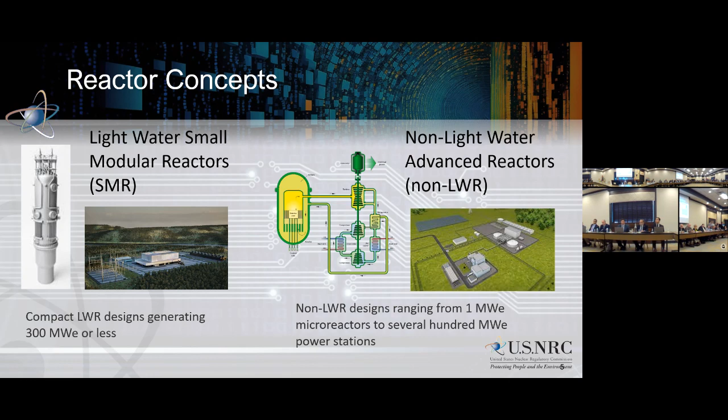So, starting with the licensing pathways for licensing an advanced reactor or any new reactor within the United States. The Atomic Energy Act granted authority to the NRC to license and regulate commercial or civilian reactors in the United States. For all commercial civilian plants, you have to get NRC approval before you can build and operate a nuclear power plant. The NRC maintains oversight of those plants throughout the life of the plant, from construction through operation, decommissioning, et cetera.

If you want to license a plant today, you have two main pathways within the NRC's regulations, in Title 10 of the Code of Federal Regulations. Part 50 was the original licensing pathway; most of the existing fleet has been licensed through the regulations in Part 50.

That is considered a two-step process, because you start by applying for a construction permit to authorize building the plant, and then separately follow that with an application for an operating license, which would allow you to operate the plant.

Later we developed Part 52, which was an evolution considered a single-step process, because it combines the construction permit and the operating license into one application—what we refer to as a COL, or combined license. That process was used recently for the Vogtle designs.

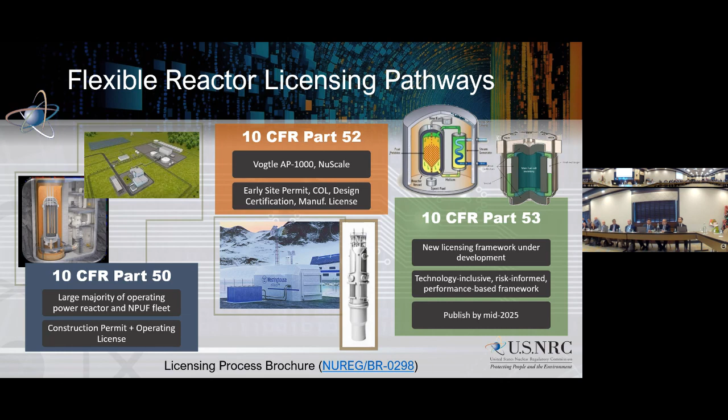So, thank you. I thought I'd give you a little more detail on each of these processes. For the Part 50 process I mentioned, the applicant—the utility—would submit a construction permit application, and we review that application, assessing the safety of the plant based on the preliminary plant design.

The public hearing is one of the ways public involvement can be factored into this process. The Atomic Energy Act and our regulations require mandatory public hearings for some of the licensing processes, and there are other opportunities for additional hearings at certain points.

So step two, the operating license application - at some point while construction is ongoing, after we've issued the construction permit and they start building the plant, the applicant can submit their operating license application while the plant is being built. That operating license application is based on final design information.

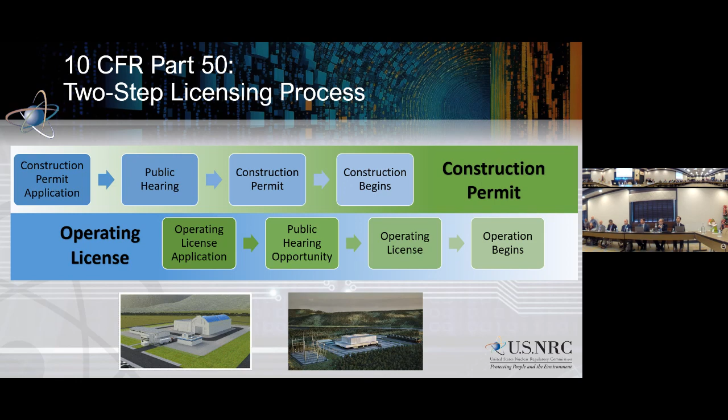So many of the current fleet, most of the current fleet, was licensed under Part 50, and many of the new advanced reactor designs are using the Part 50 process - a construction permit - because of the factor that they can start earlier with building the plants.

Those two reviews are the key areas, the key components of the overall review, and will eventually inform the commission on the decision whether to grant the license. When we issue a combined license, we're authorizing them to build and operate the plant.

Now there are criteria they have to meet once the plant is built - we call them inspections, tests, analyses, and acceptance criteria - that they have to meet before they can actually load the fuel and operate the plant. So there are still some checks after the plant is built before they're allowed to actually start the plant.

Some of the other things you can do under Part 52: you can apply for an early site permit, which basically lets you pre-approve a site without having your reactor design picked yet. That looks at site criteria to make sure it's a safe site for the plant, emergency preparedness considerations, things like that.

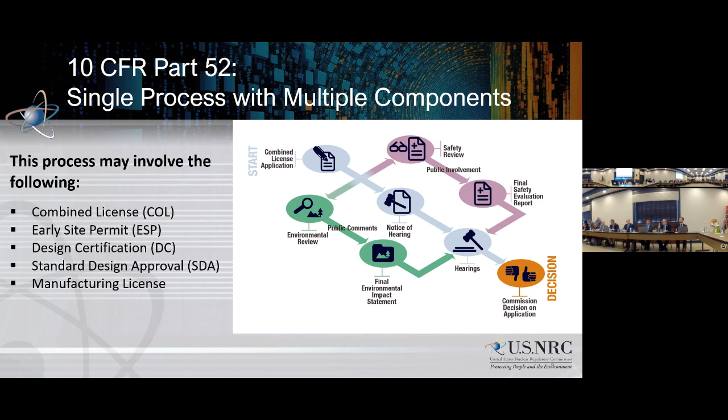Part 53 is, as I mentioned, the heart of our efforts to develop a flexible, technology inclusive, risk informed licensing approach. It's the keystone of building that regulatory framework, but there are many other activities that go along with preparing for that framework. Technology inclusive means that when the Part 53 pathway is available, you can use it for any type of technology. Our current regulations were built mostly geared toward existing light water designs, so this is meant to be more neutral.

I will note that even when Part 53 is available, a plant still could use Part 50 or Part 52 regulations. Those are options of licensing pathways. Risk informed means we're scaling the requirements of our review based on the risk and consequences of the facility, and performance based refers to the regulation creating clear and objective criteria to assess performance, while licensees have the flexibility to determine how to meet those criteria.

So here's where I started to mention the parallel reviews. I'll spend a couple slides talking about how these go in parallel. If an application is accepted, we proceed with an environmental review and a safety review, and those are focused on developing two key documents.

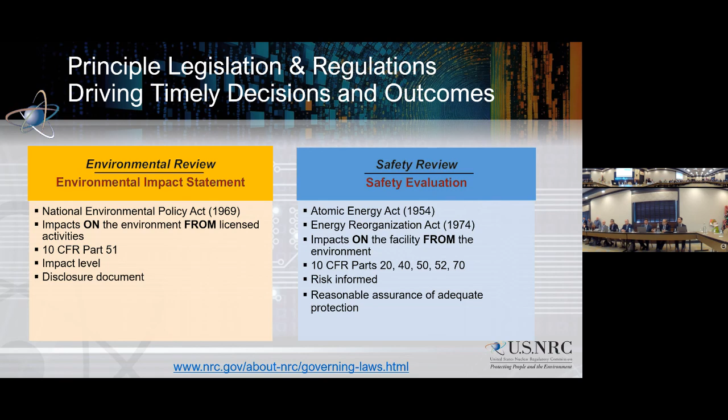Our current regulations are based primarily on the original designs of light water technology, and we're developing this technology inclusive framework. There are significant differences in how these plants are operated, controlled, and moderated, but fundamentally it comes down to key fundamental safety functions that we review as part of a safety review. Every application has to define what are called principal design criteria, which form the basis of the safety case for an application for a plant.

We have in our regulations design criteria that tell you how to establish those design criteria for your design. There are a number of areas spelled out in Part 50 and our general design criteria—I think there are like 64 criteria—but it ultimately boils down to key fundamental functions: reactivity and controlling the power of the reactor, how you control that reactivity, the fuel being a key component—how you maintain the condition of the fuel and qualify it for use—and the systems used to control that reactivity or power of the plant.

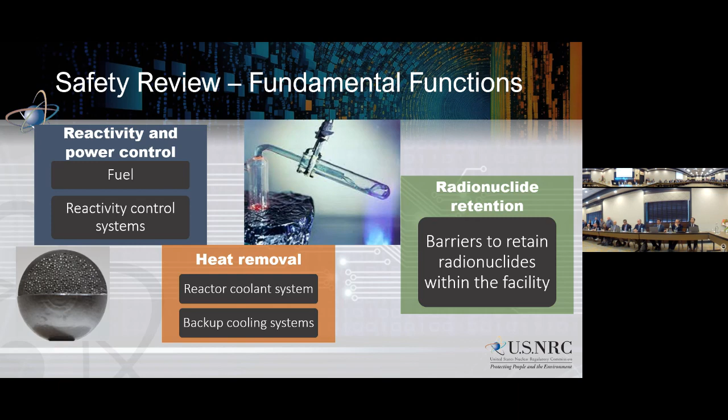This provides a little more detail on some of the key topic areas I was alluding to within those fundamental safety functions. The safety review looks at a number of things.

I mentioned fuel qualification and reactivity control, things like instrumentation and control, and radiation protection programs for both workers and the public. Accident analyses look at potential accidents and, based on the design of the plant, understanding what those potential accidents are and ensuring you've appropriately analyzed them and have systems in place to prevent and mitigate any potential accidents. Then operational programs—there's a whole host of operational programs that are part of the application as well, which we review to make sure the plant will be operated to meet the safety requirements of regulations and the adequate protection of public health and safety, as noted in our mission.

The scoping process is where we go out and meet with the public in the local area, in the affected area where the plant is proposed to be built. We gather public comments both at meetings, or they can submit written comments during that scoping period. That's followed by a scoping summary report to let people know what comments we received.

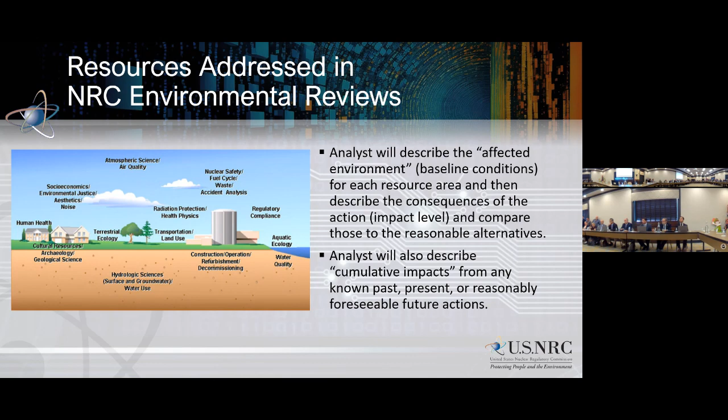Coming down to the last few slides here. I wanted to give you a little update on what we're seeing. We've been preparing for advanced reactors and small modular reactors for a number of years, and we have a few reviews underway right now, as a matter of fact.

Kairos Power is a company with a test reactor, the Hermes test reactor, currently under review. That's a 35 megawatt thermal, salt-cooled, high temperature reactor. We just recently completed the mandatory hearing, back in October a few weeks ago, for that construction permit application. They also have a second test reactor, Hermes 2, a dual-unit follow-on, and we recently accepted that construction permit application, so that one's under review as well.

Then Abilene Christian University submitted a construction permit application last year for a small 1 megawatt molten salt research reactor to be built on the campus of Abilene Christian University. So that review is ongoing. Like I said, it was accepted about a year ago, and we're working through the review process at this point on that one.

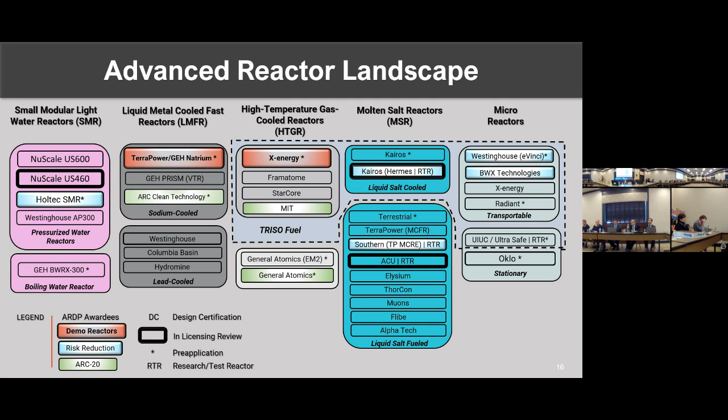Okay. This is my last slide, and this is essentially a wrap-up slide. As I mentioned before, we have been working on preparing for small modular reactors and advanced reactors for several years. I think the commission put out an advanced reactor policy statement, I think it was 2008. In 2016 and 17, we put out vision and strategy and implementation plans, and we've been working to execute those plans. And then, as I mentioned, NEIMA directed us to develop this framework and put specific timelines directed by Congress. So along those lines, we've been doing a number of things.

We have MOUs with the Department of Energy that focus on a lot of collaboration, helping us develop reports for fuel qualification, for example, and a lot of international collaboration. Some of the key things are the policy issues, and we've addressed more than 35 policy issues. These cover a whole host of areas; we're running short on time, so we probably won't get into all the different things. And then not only Part 53, I mentioned over 60 guidance documents that we've been developing over the last several years. I think these numbers are just since 2018 to prepare our framework and be ready to license these new designs. And we've been seeing a growing interest in these designs and applications.

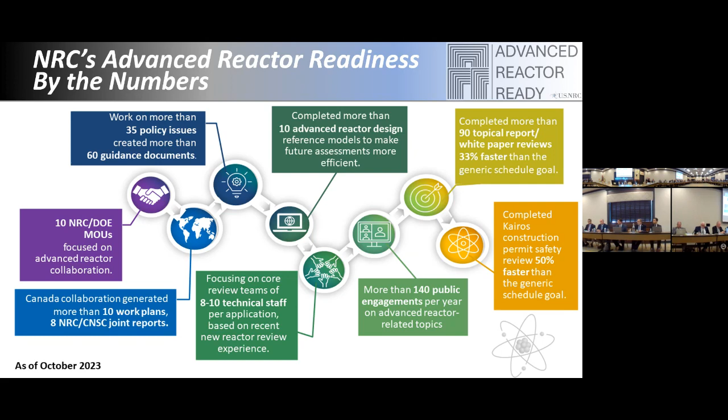All right, so let me pass the baton here. I'm going to turn it over to Duncan White to talk to you about fusion.

Yeah, as I said, my name is Duncan White. I had the privilege last year to talk to this committee about Agreement States. And again, thank you for the opportunity to come back this year to talk about fusion systems.

grid to produce electricity through fusion, and laid out some framework and some particular items that they needed to accomplish to get that done. Again, the reason I'm putting this slide up is that this is a federal government-wide approach to it. NRC is involved with the safety side of it.

The Department of Energy is involved with promoting the technology and promoting the scale of different commercial approaches. They've issued grants, and there's other groups that are involved with international coordination and education. There's a lot of federal agencies involved, but we're just one of them. But again, this is why we're interested in it.

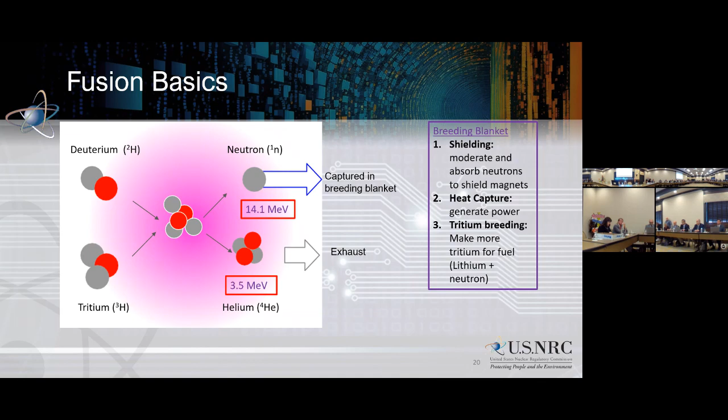You see on the slide on the right there a breeding blanket. The breeding blanket doesn't only capture the heat that you use to generate electricity, or whatever you want to do with the fusion reaction, but you have to breed tritium. That's why it's an important aspect of it. However, doing this is very difficult.

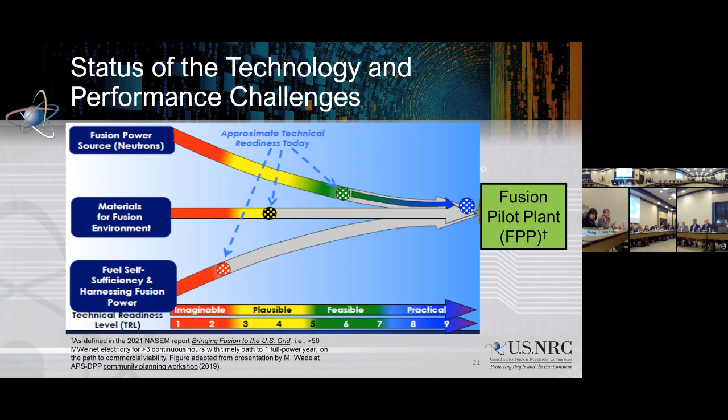So why am I here talking about fusion? Why are we doing this if it's down the road? Well, Steve mentioned NEIMA. In NEIMA, it talks about advanced reactors, and the definition of an advanced reactor includes a fusion reactor. It directs the NRC to have regulations and guidance in place by December of 2027. This is why we're doing it.

The staff prepared a commission paper, sent up at the very end of 2022, early 2023, and the Commission directed staff to regulate near-term fusion systems under Part 30.

This is the same part that's used for radioactive material used in medical facilities, commercial devices, radiography, the commercial irradiators. This is not going to be regulated like a reactor. It's going to be regulated as radioactive material. Staff has also been told that they have to come up with a single guidance document to look at the different types of fusion technologies, and we'll look at that slide in a few minutes to see the approach to do that.

We also had staff directed to talk about what's called near-term fusion systems. What is a near-term fusion system? We'll look at the next slide, but again, it says it's something beyond that they could come back to. Right now, we're planning for what we know we can do. There's a lot of companies out there that have big plans. We're just going to try to regulate what we know will likely happen in the coming years.

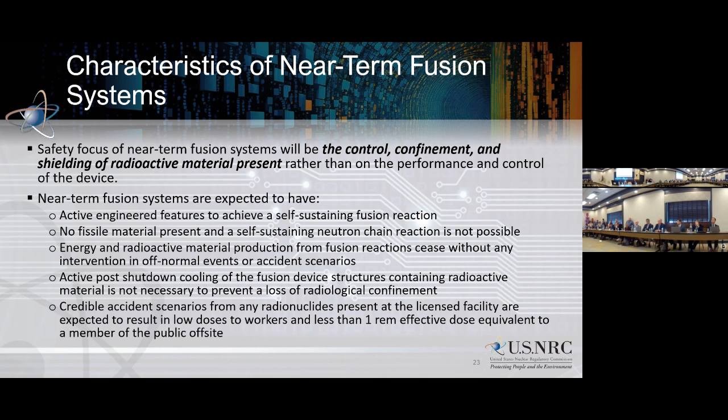And again, the off-site doses are a lot lower. The biggest concern is tritium. Tritium is a low energy beta emitter. Although there's a lot of it used in some devices, the modeling and what we know so far shows the doses are a couple orders of magnitude lower than commercial fission plants right now.

For magnetic confinement, they've come close to achieving fusion conditions in the confinement. The Chinese have actually maintained a plasma continuously, not at fusion conditions, but for 17 minutes. So there's been advancement done in recent years to show that this is a viable approach.

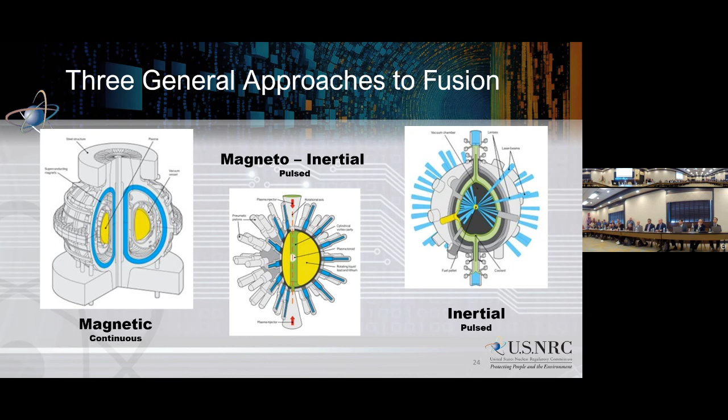So what's going on right now? Fusion R&D has been going on in this country for many years. It's all been regulated by agreement states, and it's been regulated safely by agreement states.

Again, in the last 10 years, there's been a number of commercial companies. There's now like 44, 45 companies across the world pursuing fusion. 25 of them are located in the United States, and those companies have generated over $6 billion in private investment. This is what caught the attention of a number of people, that there's private investment. Again, this is not public money, this is private money being put in.

In addition to the R&D going on, there's 2 companies right now. Commonwealth Fusion is building a tokamak, a magnetic confinement design right now. The plant is under construction and is to go online in 2025. It is a research plant, but they've already submitted an application to the agreement state. They expect to prove that the tokamak conditions do work.

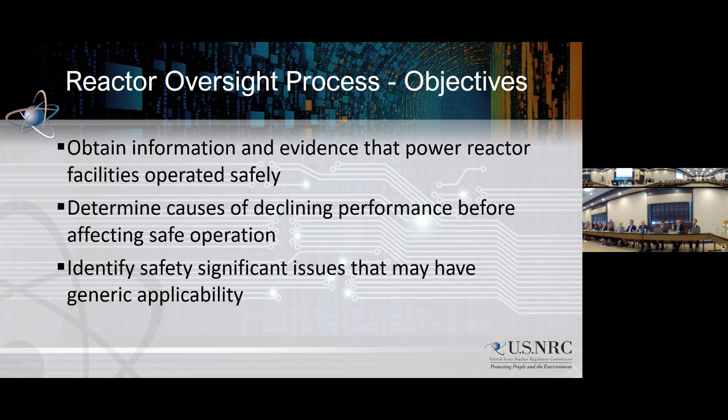What are the objectives of the reactor oversight process? Three of them right there. Obtain information and evidence that the power plant is operating safely. Second is to determine any cause of decline in performance before they actually have a safety issue. The last one is to identify any safety significant issues that may have applicability to other plants in the industry.

When we talk about reactor safety, it's actually avoiding accidents and reducing the consequences of an accident. When we talk about radiation safety, we want to protect both the public and the workers from radiation exposure. The last one, safeguards, is to protect the plant against sabotage and other security threats.

We would inspect the area where there's a cause for a plant trip or something that could cause a plant trip. Mitigating systems is another cornerstone under reactor safety. For example, an emergency diesel generator would be mitigating system equipment. If that had an issue, that's an area we look at, follow up on, and characterize with some type of color—I'll talk about the colors in a second. So those are two examples of reactor safety.

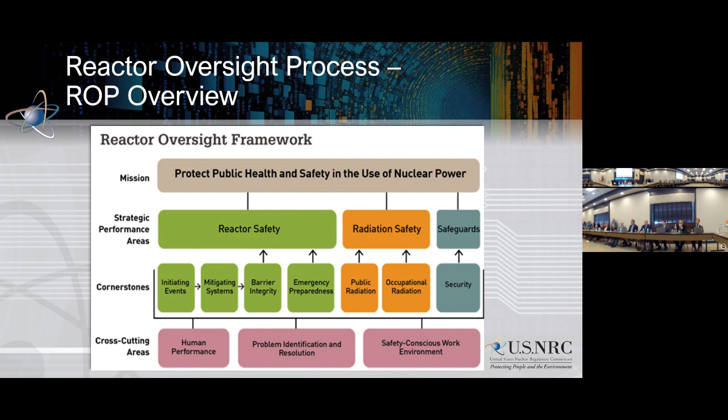The reactor oversight process has two main components. First is the performance indicator program. Second is the inspection program that determines findings. Findings are issues of concern that are considered more than minor. Findings get screened through a process, and that process is very prescriptive. It has them determine whether that issue of concern is greater than minor. If it is, they proceed into classifying what type of risk it is.

What I mean by plant risk is: if the equipment is taken out of service, what does that do to core damage? With that equipment being out for a certain period of time, does it affect core damage adversely? The more issues they have with equipment out of service, or issues that have a higher risk, they get a different color. Green is very low risk, white is a little bit higher, yellow up to red. And that's all based on probabilistic criteria.

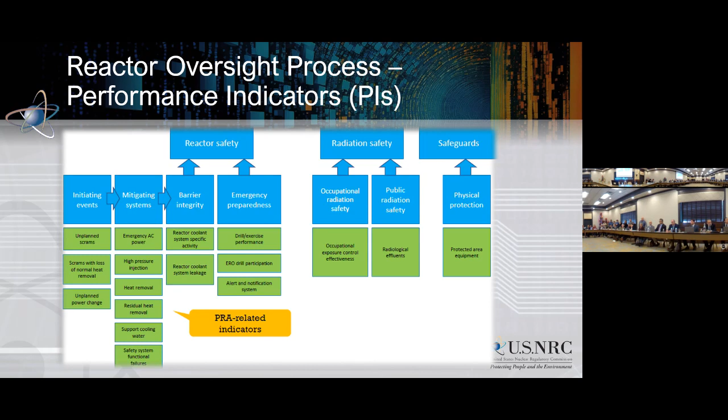I just talked about the first part of the ROP, performance indicators. Now I'll talk about the significance determination process. Its objective is to characterize any safety significant or security issue, using the best information available, and assign a color to it. It also communicates to stakeholders a common understanding of what the issue is and how significant it is, and provides a basis for timely assessments or enforcement actions for that inspection finding.

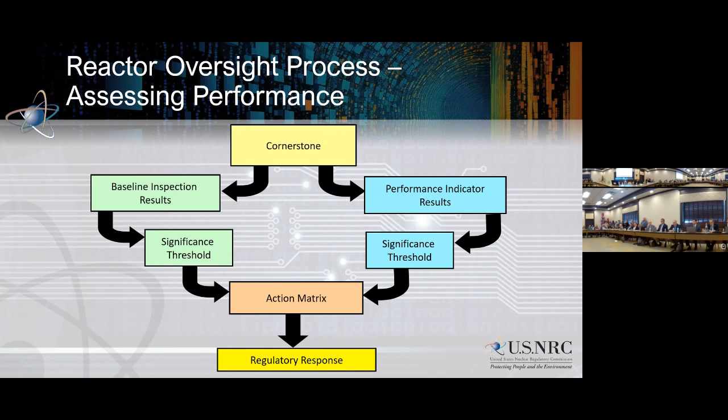That concludes what I wanted to talk about with the ROP process. One thing I'll add is we look at this quarterly. Inspectors at the site inspect the plant daily, and we have special inspectors from the regions look at specific programs. They issue a report every quarter. Every six months, NRC staff expand their review and include planning for the following twelve months. At the end of the year, a more detailed assessment is made and a performance report is written.